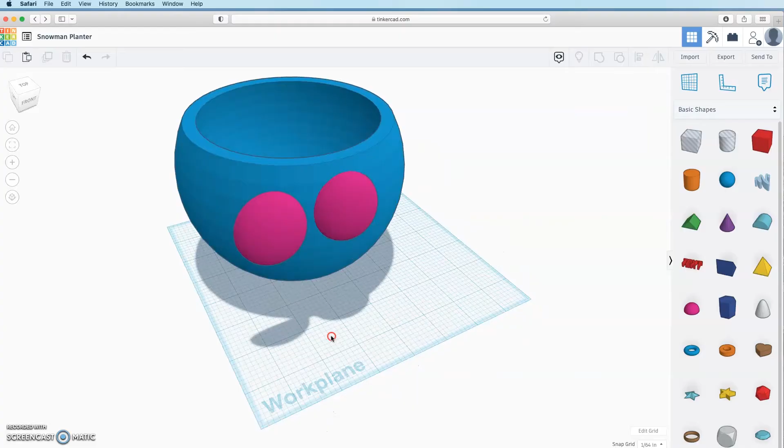Last time I showed you how to make a layered laser cut holiday ornament decorated with snowflakes. Today, I'm going to walk you through the process of designing a 3D printed planter or vase in the shape of a cute little snowman. Next time, I'll show you how to add light up eyes to the snowman, so stay tuned.

Now the first thing we're going to do is open up TinkerCAD. TinkerCAD is free web-based software that lets you create and edit 3D designs. For now, just go to tinkercad.com and create an account.

To create an account, click this Join Now button, then create a personal account by clicking this button right here. Make sure to remember your sign-in information, so email addresses, passwords, write it down, have that saved for next time. Next time you sign in, you're going to click this sign in button and use that information to sign in. Now, because I already have an account, I'm going to click this sign in button, click email or username, and type in my information.

So this is what my TinkerCAD dashboard looks like. Yours will look different. You'll have different designs, or if you haven't done anything, you won't have any designs created yet. So what we're going to do now is go to Create New Design. That's this button right here, and that's going to take us to our TinkerCAD workspace.

Let's take a look at some of the functions here. The first thing you'll notice is it gives your design a name. We're going to change ours. We're going to call this Snowman Planter.

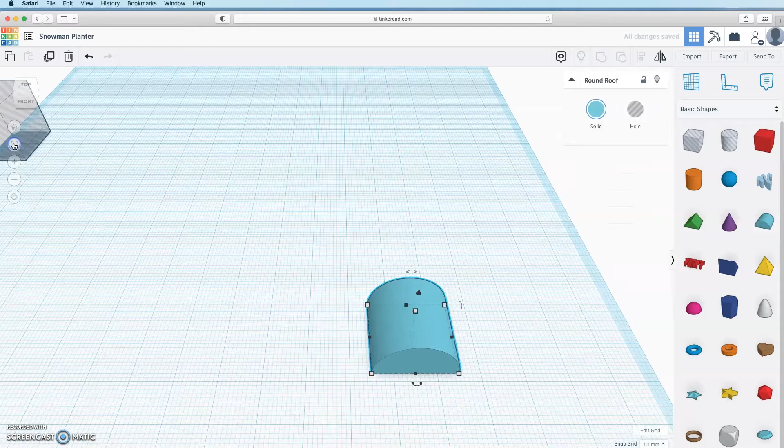You have your navigation tools over here. You can use this little square here to choose head-on views. You can always click this Home View button to return to the main view. Fit all in view, that's if you have a design, it'll kind of center it on the design. Then you have zoom in, zoom out, and this switches to a flat view, so it's like a 2D view.

On this side, you have your basic shapes that you can choose from. There are more shapes in here also, but right now we're just going to use our basic shapes. You have your work plane, which we'll be using a little later in this tutorial, for an example of what it does.

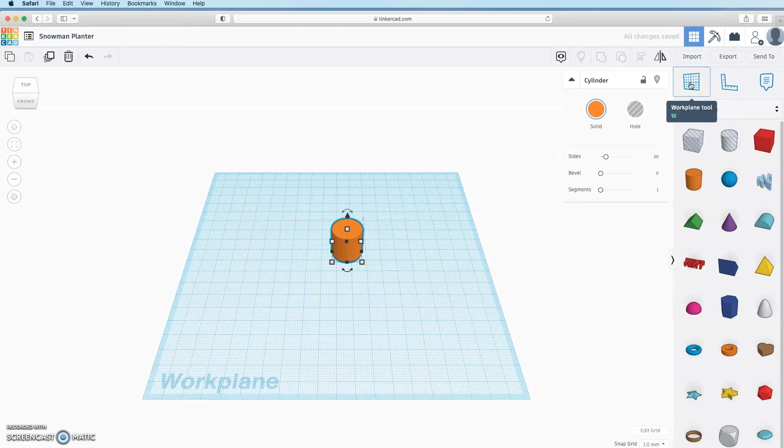Put your cylinder down here, and everything here is just drag and drop, okay? So you click, hold, drag it, and let go. Let's say I want to drag something onto the top of my cylinder exactly. What I'll do is take my work plane, drag it to the top of my cylinder, drag my next item to the top of my cylinder, and now you can see it's smushed onto that work plane. So now I can drag my work plane back to my original.

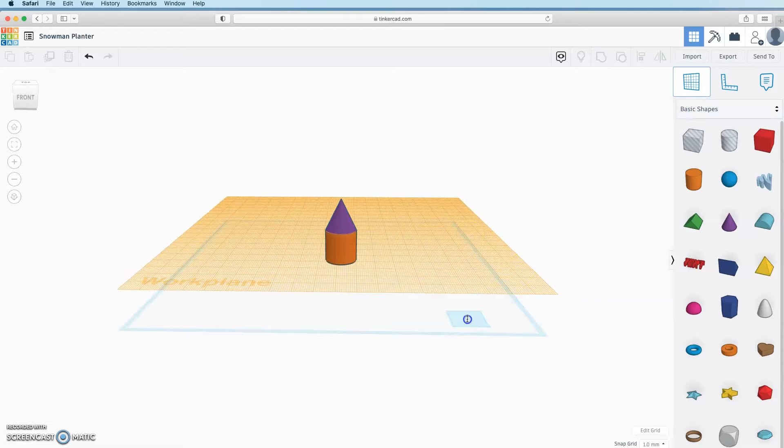I'm also going to show you the alignment tool. I'm going to click and drag to select both items, then click this tool up here, Align, and then click my cylinder. Now what this is going to do is align my cone to my cylinder. I'm going to click these little nodes here to align it. You see, now it's in line perfectly with the cylinder.

Now the next thing I'm going to do is again select them both, and click my group button here. That's going to create one object here, one object out of two.

Now you can also do that with your hole tool. Any shape can be turned into a hole. So let's say I want to take this shape here and cut kind of an irregular hole out of this original. What I'm going to do is click on this shape, turn it into a hole, select it all, and group. And now I've cut out that shape from the original.

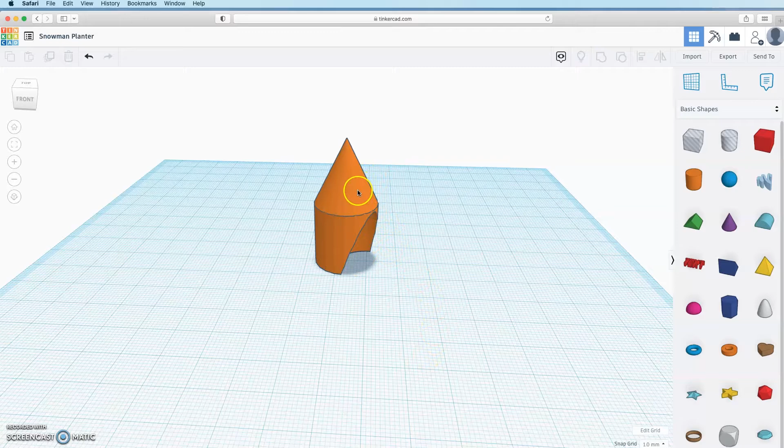Now let's say you want to kind of undo that, you don't want those shapes to be connected. You click on your object, click your ungroup button, and now you can move that shape again and change it.

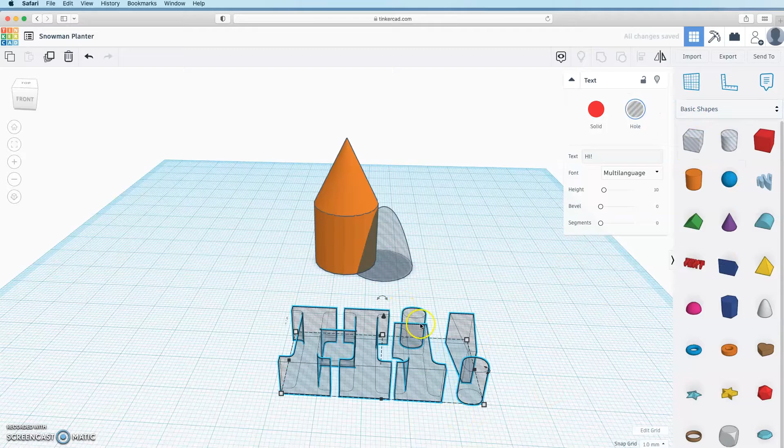The other tool that I'm going to show you is this text tool. If you click here where it says text, you can edit your text, make it say whatever you want, and then change this tool the same way you can change any other shape. You can even turn it into a hole. So, if I make a little shape here, I connect these by grouping. Now, it says hi.

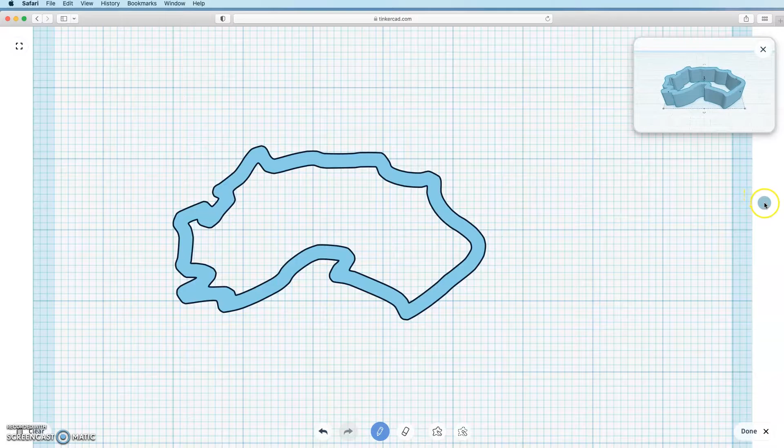And the last tool that I'm going to show you is the scribble tool. Click on that, drag it to your workspace. You can freeform a design of your choosing. You can erase, add back, and then when you click out, you hit done.

Again, you can edit this just like you can edit any other shape in TinkerCAD. You can move all of the size dimensions here.

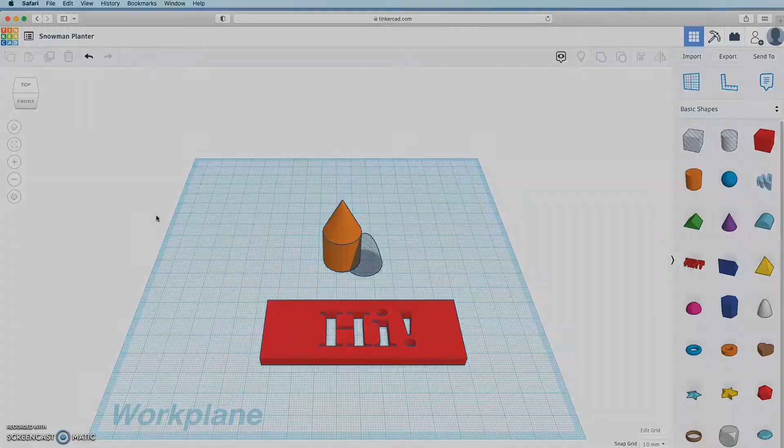Alright, so now that we have some of the basics of TinkerCAD, we're going to work on making a snowman vase. Here we are in TinkerCAD. First thing I'm going to do is hit Edit Grid. Make sure this is inches. Update grid, so we want to work in inches.

I'm going to pull this down. I'm going to change this to 6 by 6 by 6. And I'm going to take these steps up to make it smoother. Alright, now that I've done that, I'm going to zoom out a little bit.

I'm going to duplicate, to turn that into a hole, and I'm going to make this hole 5 by 5 by 5. And now I'm going to center it up. I'm actually going to put it here at the top because I want some more room in the bottom, some more space in the bottom inside my sphere.

So now I'm going to group these. So to flatten the bottom, I'm going to take this and make it 8 by 8. Select them both by holding down Shift, click my alignment tool, click the sphere to select it as the thing we're aligning to, and hit both of these nodes so I'm aligning my hole to my sphere. And now I'm going to change this to 0.4, and that's the height.

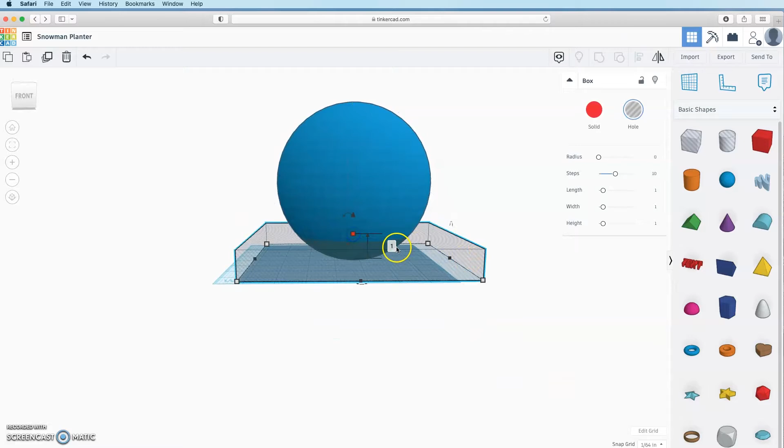Select it all and group. Okay, and now you can see I have a nice flat bottom. So I'm going to click that and click the D button. D is in dog, or in this case drop. It's going to drop it down to the active work plane.

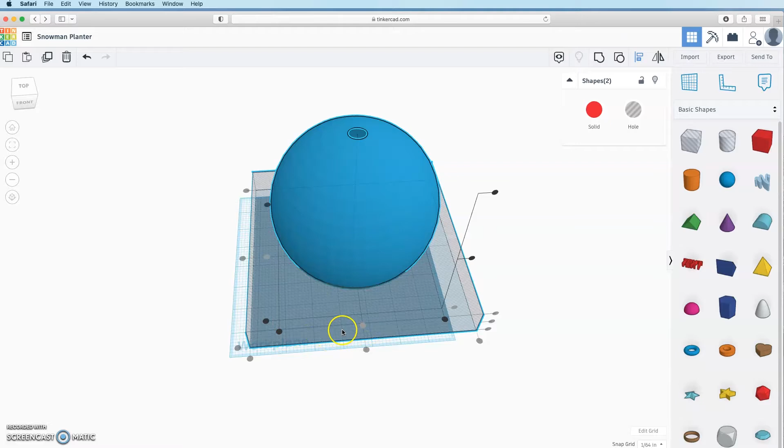Alright, so I'm going to repeat that. I'm going to make an 8 by 8, and now I'm going to align it. So I've selected both by holding down Shift, clicked Align, clicked my sphere, and now I'm going to align by clicking both those center nodes there. I'm going to align to my sphere, and now I'm also going to click this top one, and that aligns it with the top of my sphere.

See? Alright, so now that I've got that, I'm actually going to change this to 1/64, and I'm going to just click it up just a touch. And I'm going to change this height to 1.5.

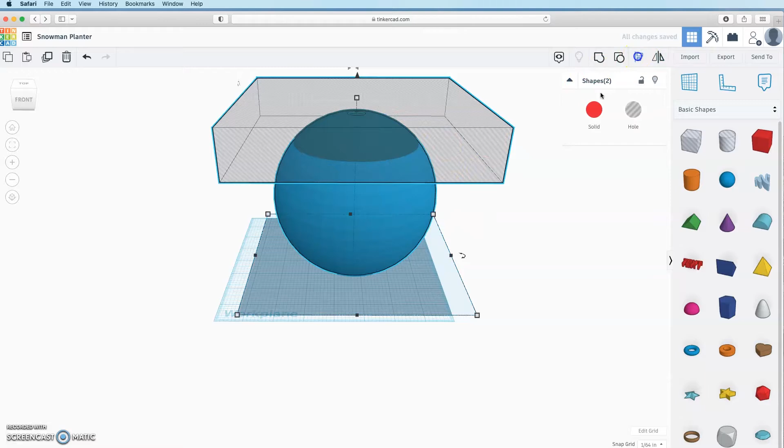Again, let's align it there to this, and let's just move it up just a touch, just in case. And select both by holding down Shift and clicking, and then we're going to click Group.

Alright, so now I have a nice top here, and you can see off to the side I have some shapes I've already made, and I've made notes about how big things need to be. I might refer to those, and you might see them in the background. Now we have our sphere. It's time to make the actual pieces of the face.

So we're going to start with the eyes. We're going to move that part of the snowman aside. We're going to take this little half sphere, pop that right down on our work plane, and change the size to 1.6 by 1.6.

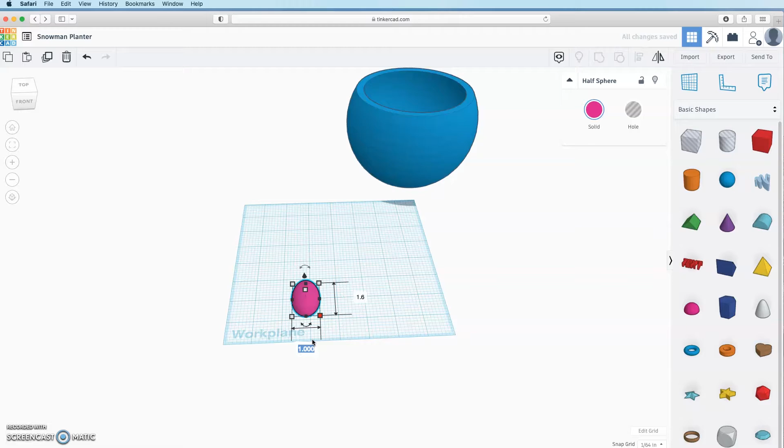Now we're going to click it, and change this to 90 degrees. Move this up, and we are going to align it to our sphere there. So we're going to click our Align tool, click on our sphere, and center that up. Now we're going to move it a little higher, and a little farther back.

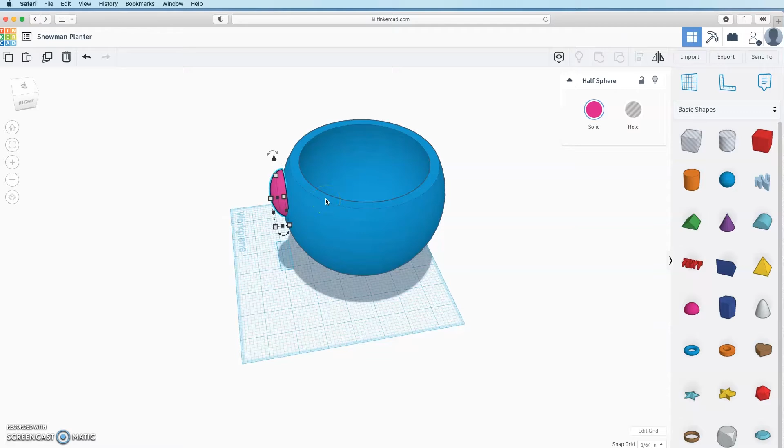And we are going to tilt it back about 10 degrees, and move it back a little, so that it's slightly sunken into the head there.

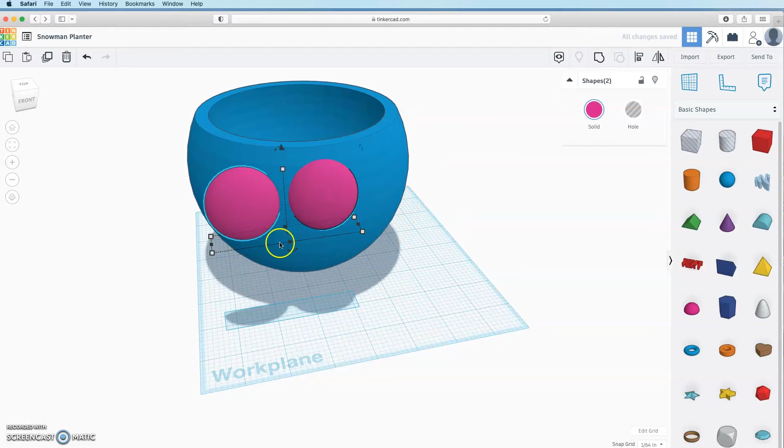Alright, now we're going to duplicate, and using my arrow key, I'm just going to nudge it apart. Now I'm going to select both of these, align them to each other first, side by side. That looks good, so now I'm going to group them.

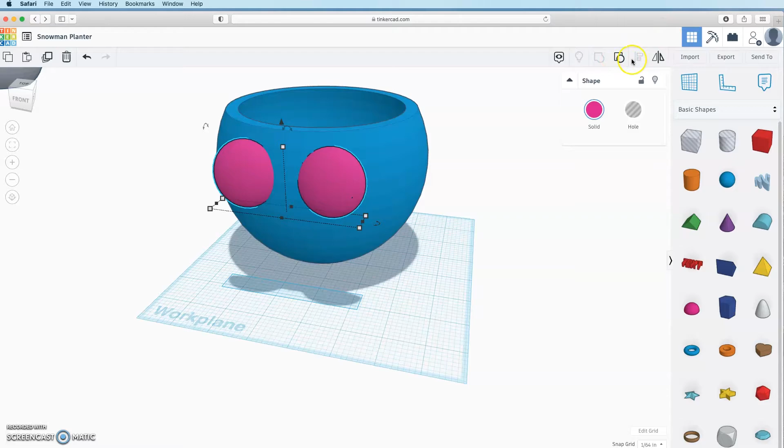And now I'm going to align that group here to my snowman head. Now I'm going to ungroup them. I'm going to move it about, let's try 15 and see, and then nudge it. Alright, so I'm going to do the same thing on this side. I'm going to take 15 degrees, and then nudge it.

Now I'm going to select both of these, turn them into holes, still holding down Shift, select my sphere, and click on Group, and see what those eye holes look like. Not quite in enough, not quite round enough. Okay, let's undo. Let's take it back another 5 degrees.

There we go, that's nice and round. Now it's time for us to make our nose.

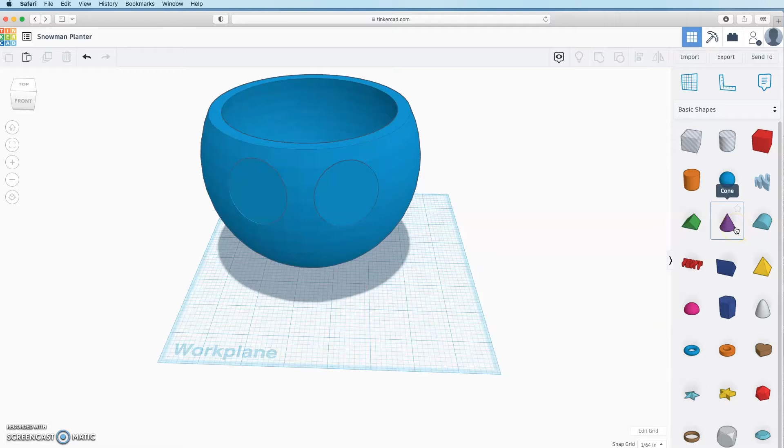So to do that, we're going to grab the cone. I actually think 1 by 1 by 1 looks almost pretty good, but we're going to make it a little longer, so we'll go with 0.75, but keep it 1 inch long. It's going to look super cute, I think. So now that we've done that, we are going to put this at 90 degrees.

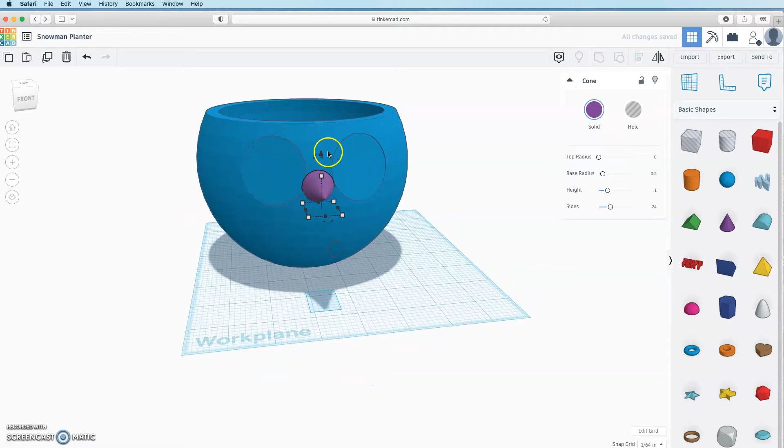Raise that up, just keep it roughly where we want it. Hold down Shift, select our sphere. Let's align, hit our alignment tool, hit our snowman. We're going to align it to our snowman.

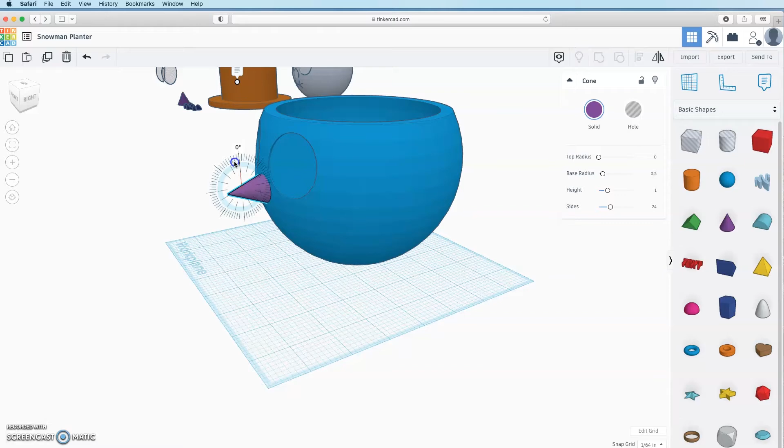It's pretty good, I think. Take it down a tiny bit more. There we go. Now we want to make sure it's just a little bit inside our snowman. Let's take this down about 10 degrees rotation. Then, using the arrow keys, we're just going to nudge it so it's completely inside our snowman.

Once we have that, we're going to duplicate. Let's actually ungroup this real quick. Let's make our eyes a group, and let's center this guy up to the eyes. Okay, it was already centered. That's good. Let's group these, so we have those eye holes again.

Now we're going to turn this into a hole. Hold down Shift, select both of these, click group. Good, so now we have a little hole for our nose to fit into, and holes for our eyes. It's all looking pretty good.

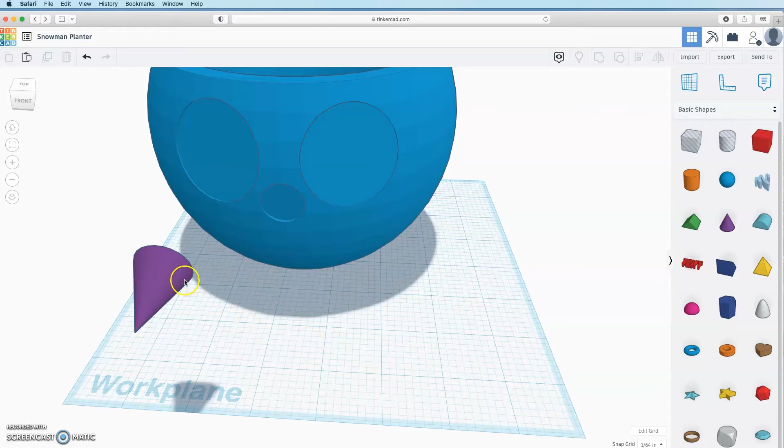This I'm going to take back 10 degrees. Now I'm going to take it back 90 and just drop it by hitting the D button onto our work plane. It's going to be another part we're going to print later - it's going to be the nose. To remind myself, I'm just going to make that orange, and I'm going to make this guy white.

So now we're going to do the mouth. It's kind of interesting, the mouth. I'm going to do something a little different, a little neat. I'm actually going to open up a new tab on the internet here. I'm going to type in Thingiverse.

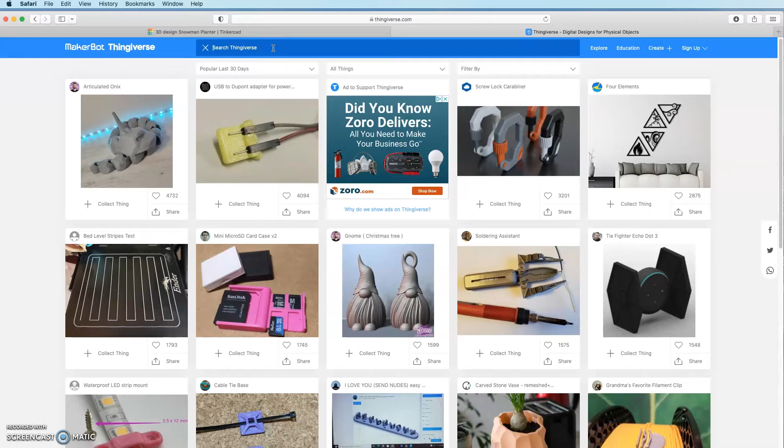So Thingiverse.com, under the search Thingiverse box, I'm going to type Vine. Hit enter. Full disclosure, I already knew about this - I used this model previously to make a trophy. So I'm going to click on that, then go down to Thing Files, and the only thing I need here is Vines Right. Download that, okay, now I can close that.

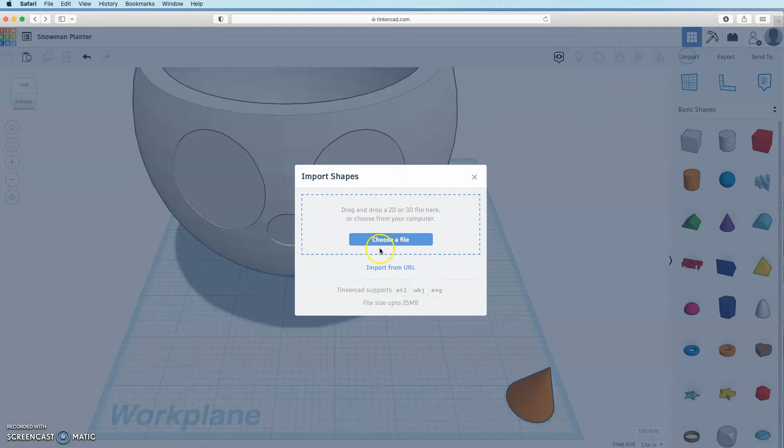What I'm going to do now is import it. Choose a file from my downloads, and it's going to be Vines Right. I'm going to hit import. Might take a little while to import - let it take its time. Okay, when it imports, it kind of looks like this.

So what I'm going to do is use this as my mouth. I'm going to rotate it so it looks kind of like a smile. How cute is that? I'm going to put a cylinder on top of it, put my sides up. So what I'm trying to do is kind of get the curve here of this shape, more or less. And we can align these.

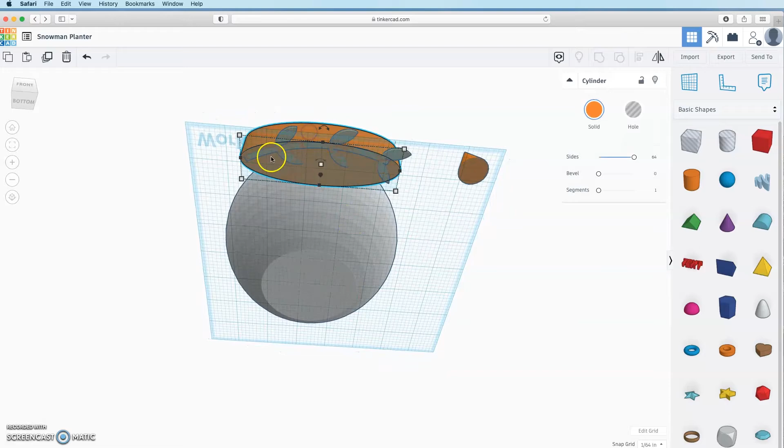Okay, once I have that, I'm going to duplicate this. Make it a little bigger so I can see it better, maybe a different color. I'm going to pull that in, again following roughly that vine there. Make it a little bigger.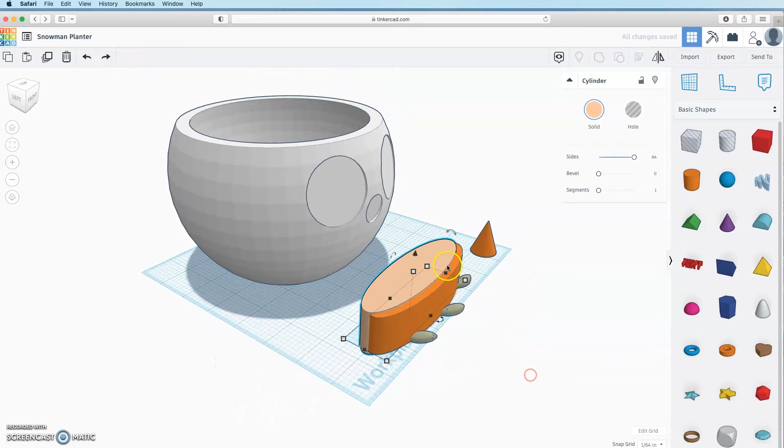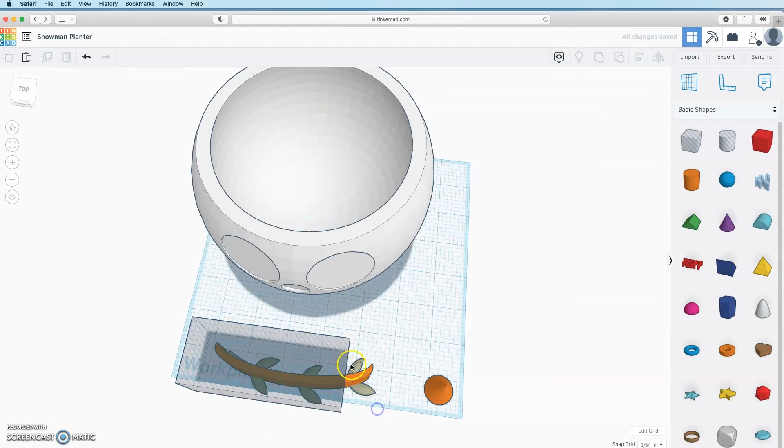Okay, I'm going to make this a hole. Hold down Shift, select both of these, and group. Now I'm going to take a hole, put it down here, sink it a little bit, and make it large enough to cover everything except just these two leaves. Select it, hold down Shift, select my leaves, and group.

So I'm kind of making a mouth here. Now what I'm going to do is duplicate this, pull it down a little bit, and make it a hole. Select my hole there, hold down Shift, select my leaves, and I'm going to click group.

So now what I should have done is made my leaves into these two separate objects, if you can see that, that cling real well to this. So now what I'm going to do is make my mouth a little smaller, and I'm going to group those. So now it's one object.

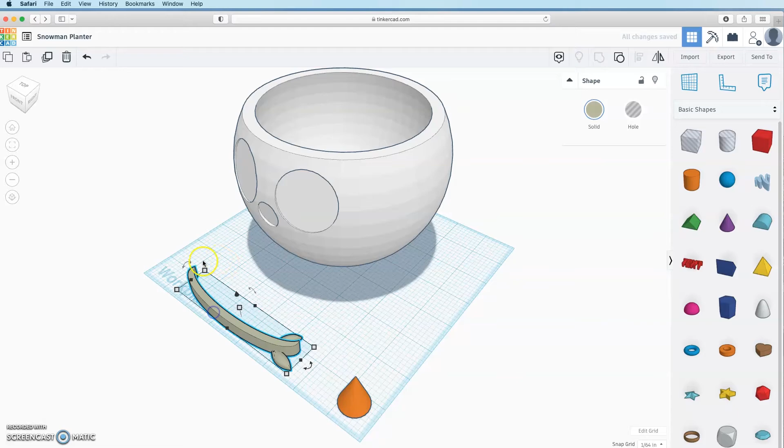I'm going to turn it here 90 degrees, and just like I did with the other pieces, I'm going to pull it over here. And now let's resize it a little bit, okay?

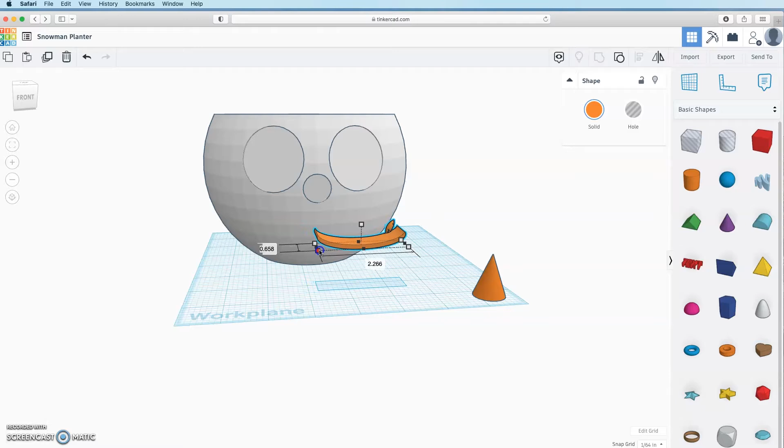Let's ungroup for a second. Make that a little bigger. Now we can regroup. Now let's hold down Shift and Control. Make this a little smaller. Let's ungroup - what we're going to do is just nudge this out. Group.

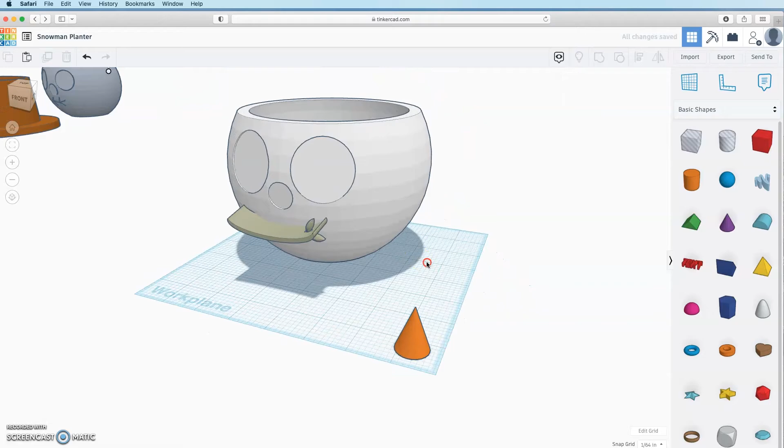Let's lower this about 10 degrees, let's nudge it. That looks pretty good, that looks super cute, right? Nice little smile. Alright, so now what we're going to do is ungroup this.

We're going to nudge that using our arrow keys so it's just kind of touching. Let's move that about 10 degrees as well. Let's pull that in a little more. It's going to be a really cute little smile, right? Make it a little bigger.

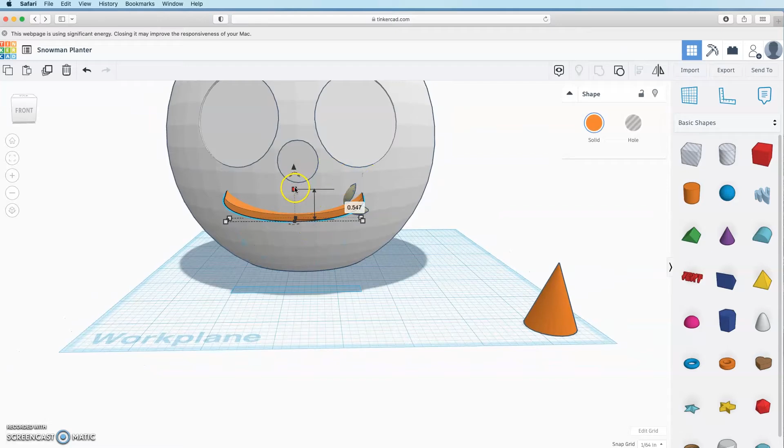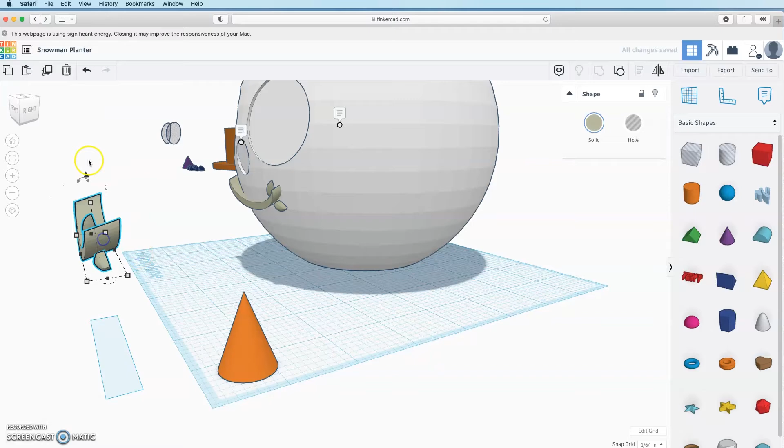Now that we have that, we're going to take these, group them, duplicate, and pull that off. So that's a piece we're going to work with in our Prusa slicer. For now we can move it in about 10 degrees, and then after that we did 90, and then drop it.

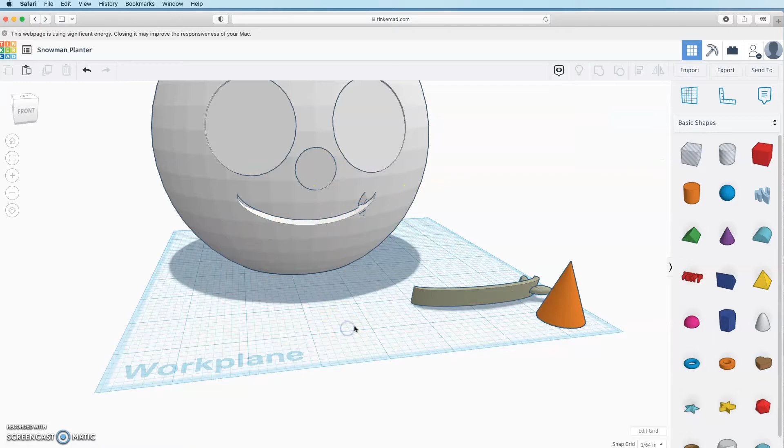So we're going to use that piece, but this one we're going to turn into a hole. Hold down Shift, select that, and we are going to group. So now this is going to have a hole there that can fit into later on. So we have holes for our eyes, a slot for our nose, and a slot for our mouth here. It's looking really cute so far.

Okay, so now it's time to make the eye sockets. Next time, what we're going to do is add some light-up LED rings that you can program with an Arduino. You don't have to do that for this project, but we're going to be building on this project next time, and part of doing that is we need to make some little eye sockets to hold the little rings in place.

So to do that, we're going to click on our snowman and ungroup him until we get the eyes here, and we're even going to ungroup the eyes. We kind of want them separate for this, okay? Now we're going to take a cylinder, drag it in, slide the sides all the way up.

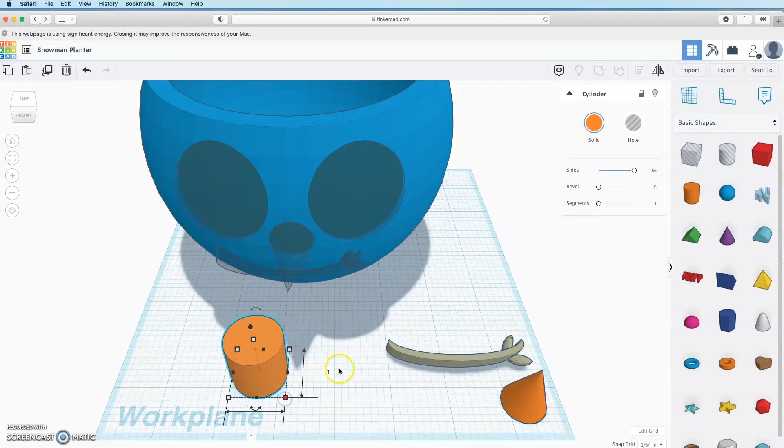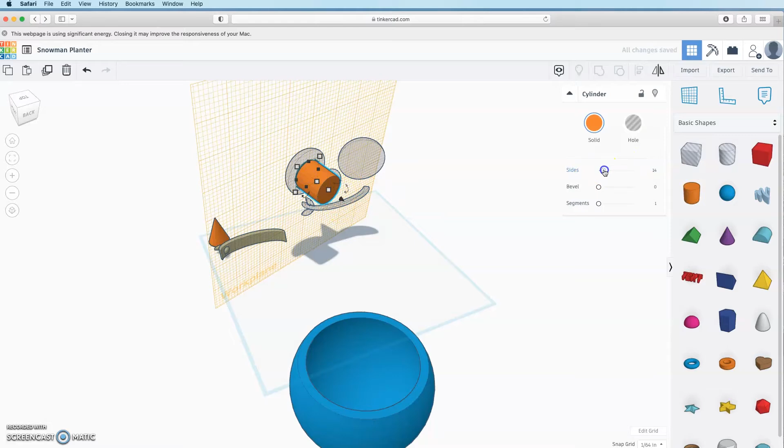We're going to make this 0.7 and duplicate. Now we're going to take our little snowman and slide him down out of our way for a minute. You know what, let's actually delete these cylinders. Let's instead drag our work plane here onto one of these. Now drag a new cylinder on, slide the sides all the way up, and change it to 0.7.

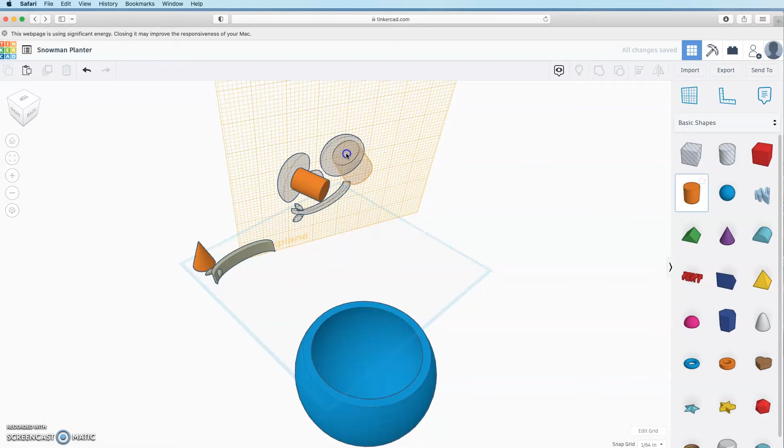Holding down Shift, select the eye there. Click your Align tool, select the eye again, and center that up. Alright, good. Now we're going to repeat: drag our work plane here onto the second eye, drag a cylinder down, drag the sides up, change it to 0.7. Hold down Shift, select our eye, click our alignment tool, click our eye, and now we're going to align.

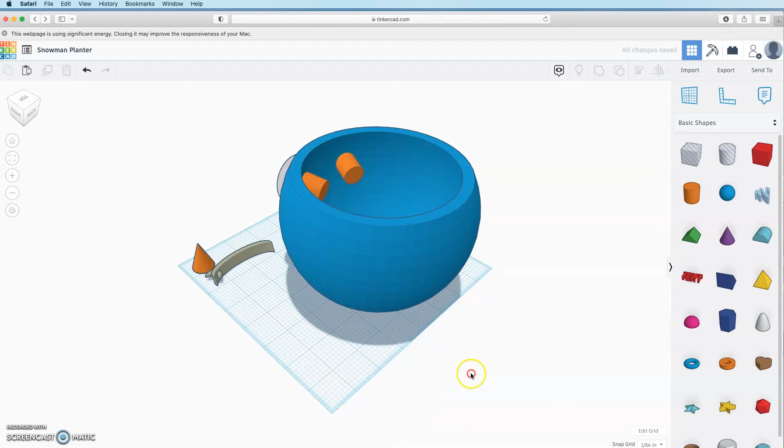Going to change our work plane back to our regular one. Click on our snowman, hit D to drop it back to its regular height. Now we're going to select our eye, hold down Shift, select our eye, select our nose, select our mouth, select our snowman, and we're going to group.

Now we see we have these going through a little bit. We don't want that, so we're going to click that and just use our arrow keys to nudge it. I did 3 little nudges until I don't see it anymore. Now I'm going to click, hold down Shift, click, hold down Shift, click, and group. Excellent, so now I have my eye sockets and I have my nose and my mouth.

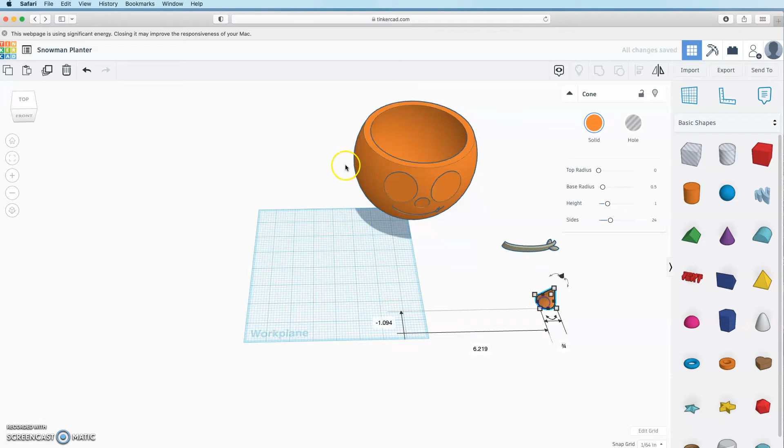So now it's time to make the hat. I'm going to move the stuff all aside a little bit so I can work on my hat, and grab a cylinder and move it down. This is going to be black, just as a reminder of what color I'm doing it in. Make my sides go way up here.

And this is going to be, if I check my notes, how big I made this? 7.5, okay?

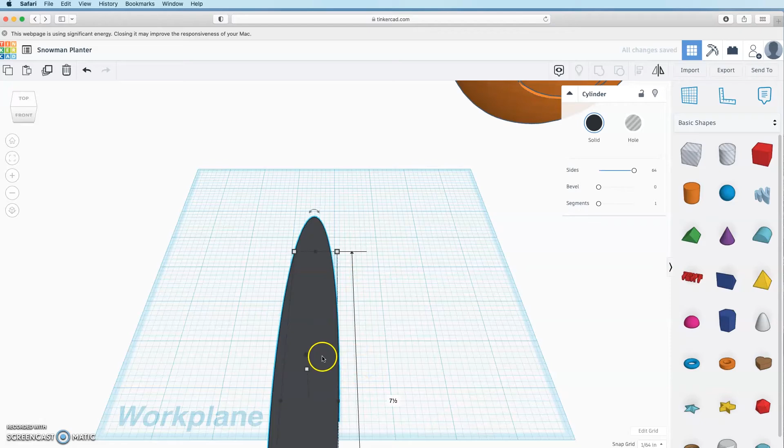So 7.5 by 7.5, and this was, I think, 0.4 tall. And I'm going to center that up.

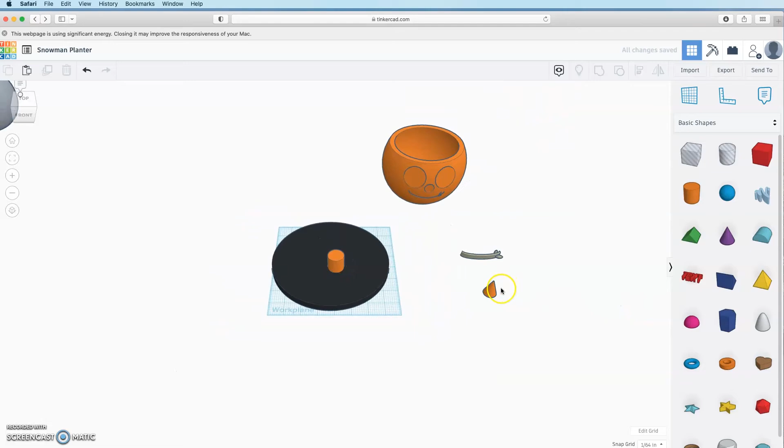Now we're going to take another cylinder and put that on top. Let's delete that, move our work plane here, take a cylinder, put that on top, then move our work plane back to its normal one. Move the sides up. Let's see how big this one's supposed to be: 5 by 5 by 3.

I'm going to click on the top of my hat here, turn it black just so I can see it better, hold down Shift, click on the bottom of my hat, click my alignment tool, click on the bottom of my hat, and now hit these two center nodes here to align my hat.

Now we need to make the hole that goes through the middle. Let me check my notes: the hole is 4.5 by 4.5 by 6.5. I'm going to duplicate this, raise it up a little, turn it into a hole, and do 4.5 by 4.5 by 6.5.

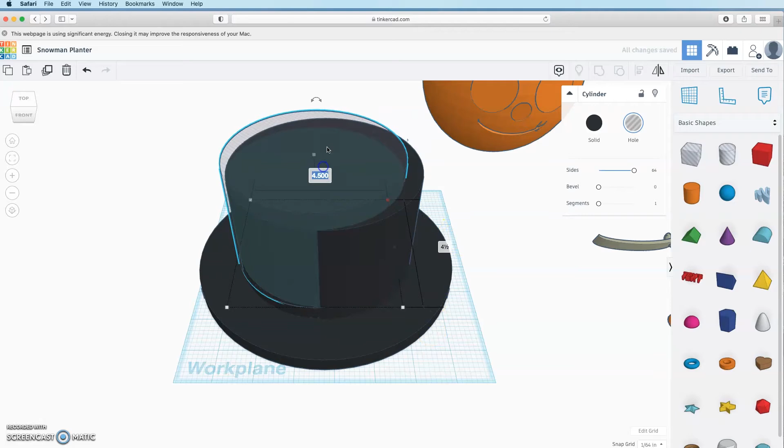Again, I'm just going to hold down Shift and select the bottom of my hat, hold my alignment tool, select the bottom, and align that right up so it's in the center. Push it down because I want it to go all the way through. Select all of these, holding down Shift, selecting each part, and group.

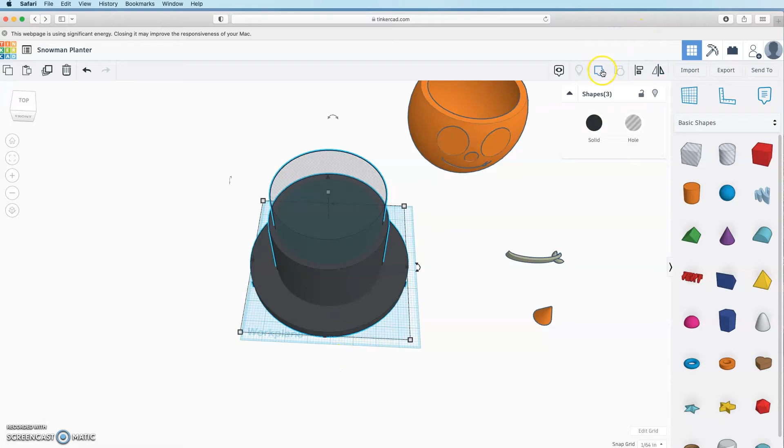So now I have my hat. It's looking good. Now the next part, I'm going to drag my snowman head right here, and I'm actually going to duplicate it, and move my work plane over here onto this rim.

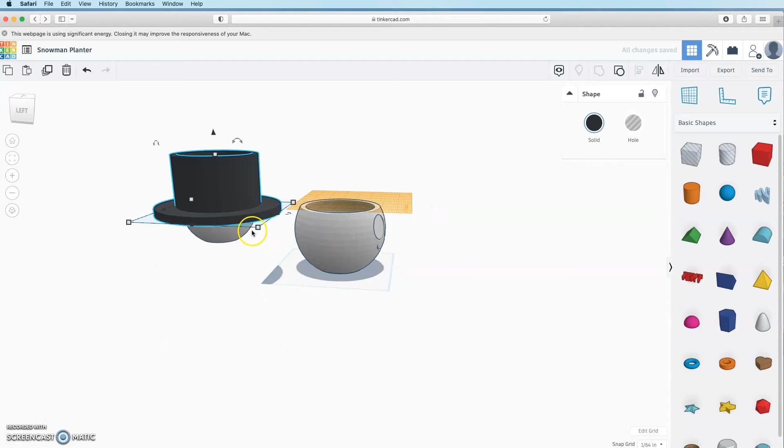Click on my hat, I'm going to hit the D button to pull it up to that work plane. Now click on my hat, hold down Shift, click on my snowman. I'm going to hold the alignment, click the alignment tool, click on the snowman again, and hit these center nodes here to line up my hat on my snowman.

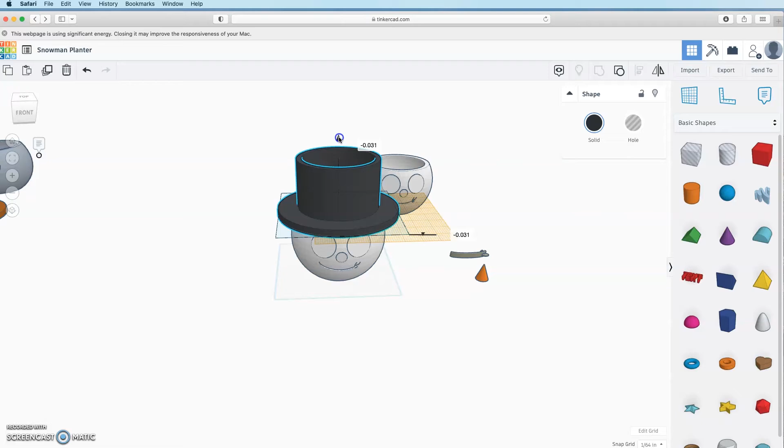Now I'm going to click on my hat and sink it just a little bit, the tiniest bit, there, so it's just a little in there. The reason, you'll see in a minute, is I'm going to turn my whole snowman into a hole. Hold down Shift, select both of these, and click Group.

Move my work plane back to normal, and if I flip this around 180 degrees, you'll see that I now have this little channel in here. See that little channel right in there? That is where my snowman is going to fit, so it's going to snap into place.

So I'm going to move that back to 180, hit D to drop that down to the bottom. Now I have my hat, my snowman, my mouth, and my nose.

Okay, these next steps are optional. We need to add some drainage holes down here because this is a planter. So if you're going to be using yours as a planter, you'll also want to add some drainage holes. We're just going to take a cylinder.

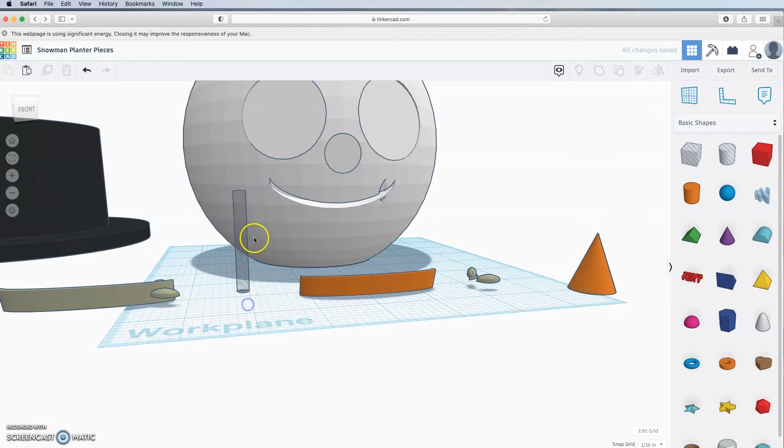We're going to make it pretty small, so let's do 0.2. And what we're going to do is make it pretty tall there, and let's duplicate. So we want 4 of them.

Now let's align these to something just so we can align it nice and smoothly. Let's take a 1 inch. What is a 1 inch? Yeah, that looks good. Okay.

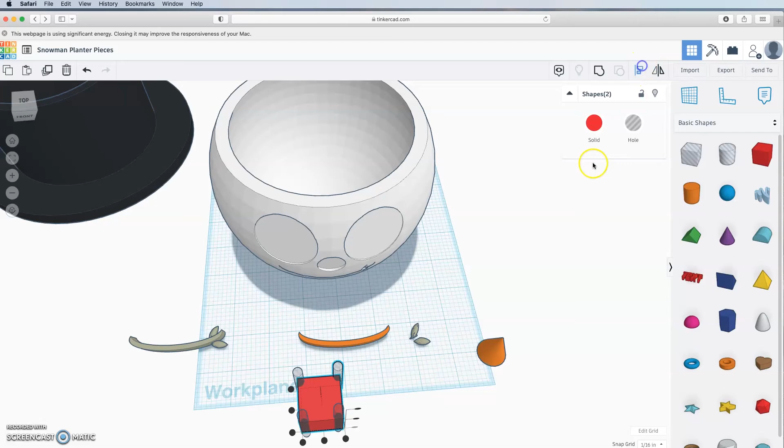So I'm going to roughly put those where I want them. Click on one of these, click Align, click that, now we're going to align it to that. And repeat.

Now when we pull that away, these should be nice and aligned. I'm going to click on these. I'm not going to turn them into holes right now. Actually, I'm going to make them solid just so we can see them, and change them into a group.

Now I'm going to center align this to my snowman. I'm going to make these nice and tall, then sink them in. I want them to go all the way through. I'm going to ungroup them, and I think I can actually push them a little further apart, so I'm just going to nudge them using my arrow keys.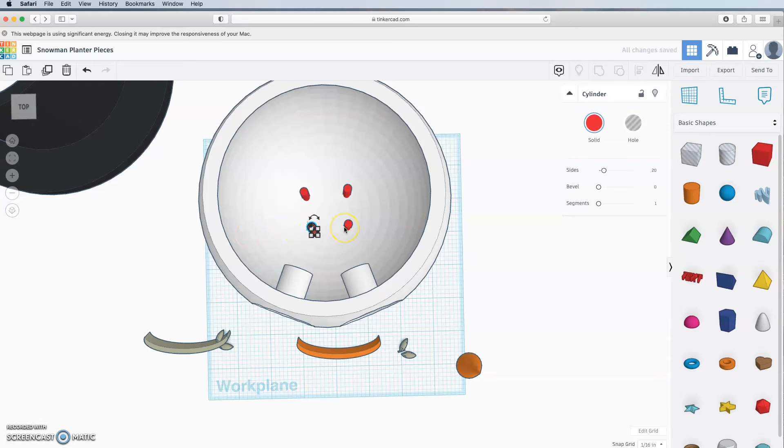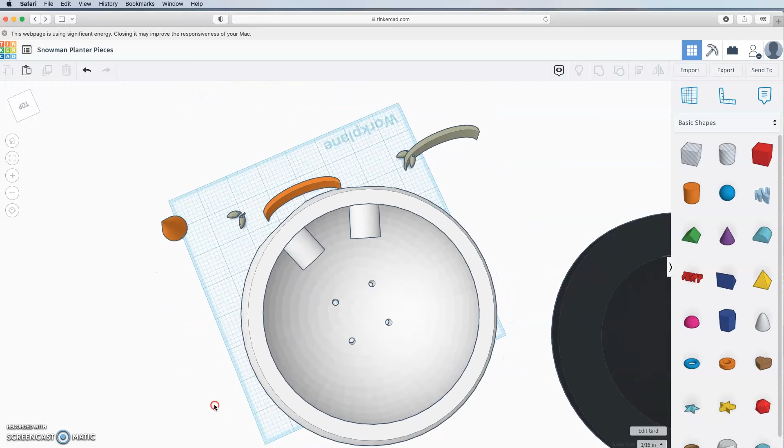And I'm going to make sure that they go all the way through - and they do. Okay, so now I'm going to click on them, holding down Shift, click on each one, hit Group. And I'm going to turn that into a hole, hold down Shift, click my snowman, and Group. Alright, so now I have those drainage holes. That's useful for a planter.

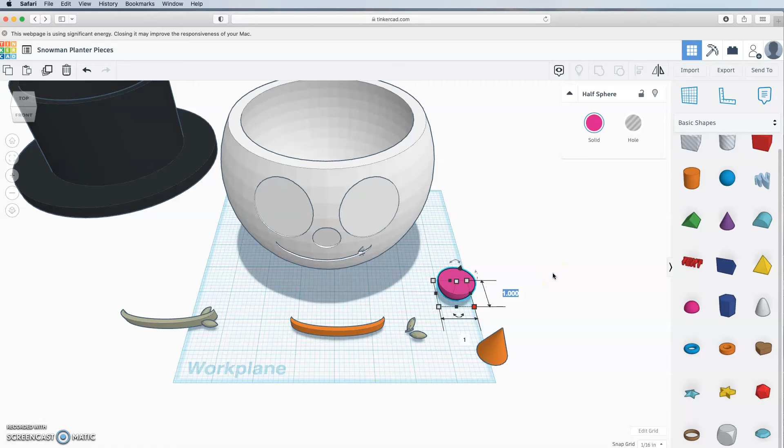And another option here is to actually add - since this is a planter and there might be drainage, let's say you don't want to have any drainage on your counter or something - it's actually to add a little plate to the bottom to do some collection. So what we're going to do here is just take a half sphere and turn it around to 180. Okay, and this is 6 by 6, so we are going to make this about 6.25 by 6.25.

We're going to make it a little taller. Let's do about 0.75 inches tall, so it's going to be pretty shallow.

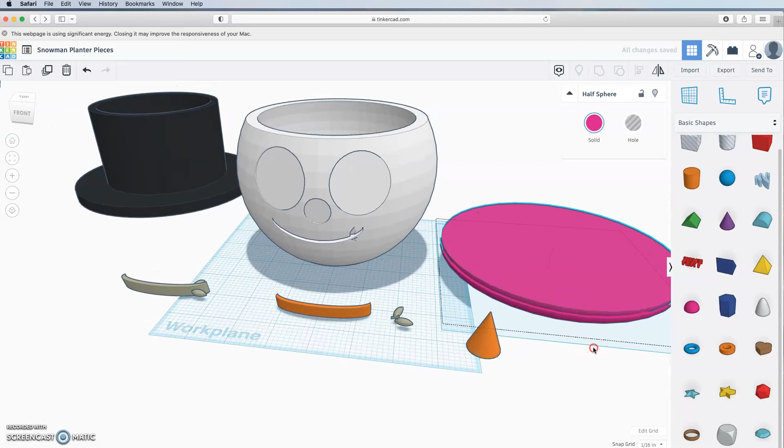Now we're going to duplicate that, and this is going to be a hole. So we're going to make this even smaller. Instead of 6.25, we're going to make this 6. And then instead of 0.75, let's do 0.5. Going to make that a hole.

And now we're going to align to the top there. Pull it up just a little bit. Select both and group. So that gives us like a little collection plate there. Now you can see that's going to sit right there.

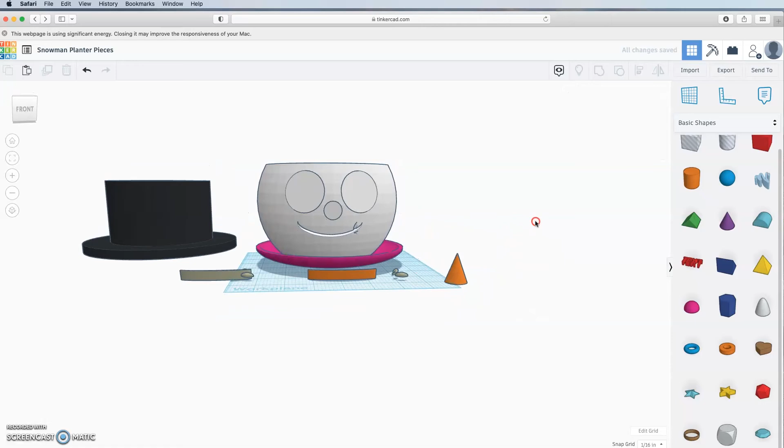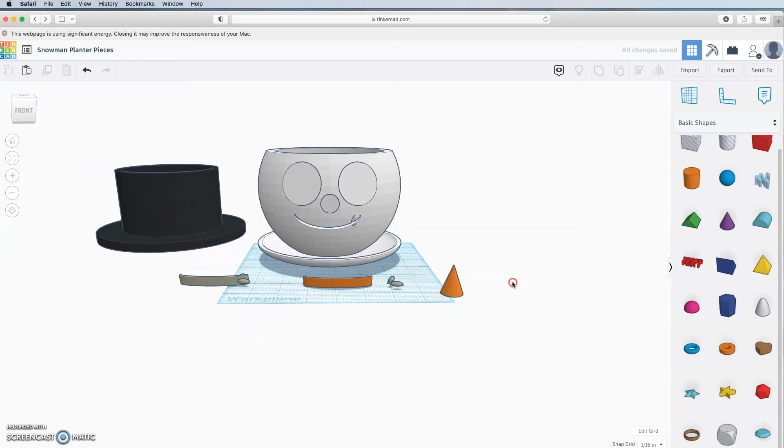So if we align these, and you lift that up a little bit, you can see it's going to sit on there, so it can collect any little drainage, and we're going to make that white as well. That is optional. If it's going to be outside, you don't really need that, but if it's going to be inside on a countertop or something, you might actually want that.

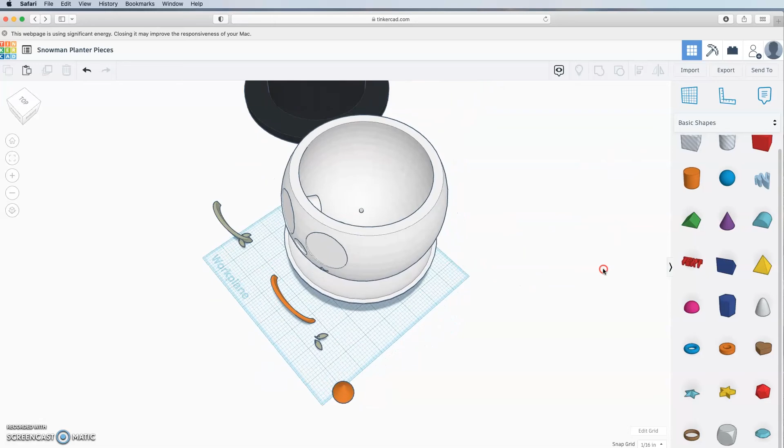Another option is if you are going to add the electronics, you're going to want to add a hole for that, so you're going to want a tube so that your cord has somewhere to go. To do that, we're going to take a little cylinder, and 1 by 1 should be big enough. Gonna make that 90 degrees. Gonna make it kind of long.

Hold down Shift and select our snowman. Select our alignment tool. Select our snowman again. Let's align it here to the center of our snowman. Basically, you want a channel here to feed the electronics through.

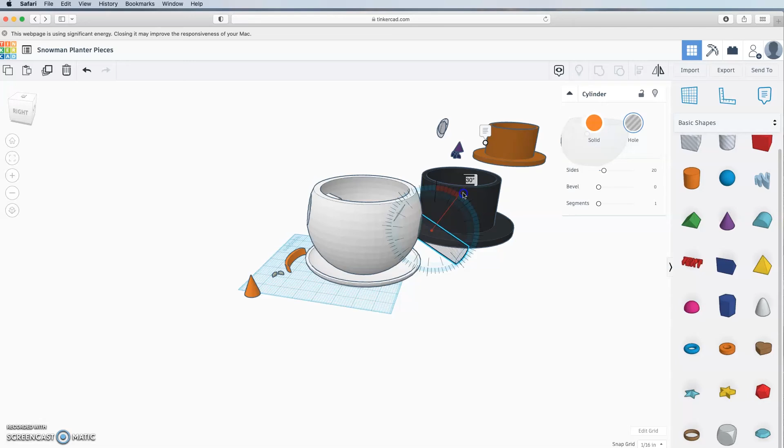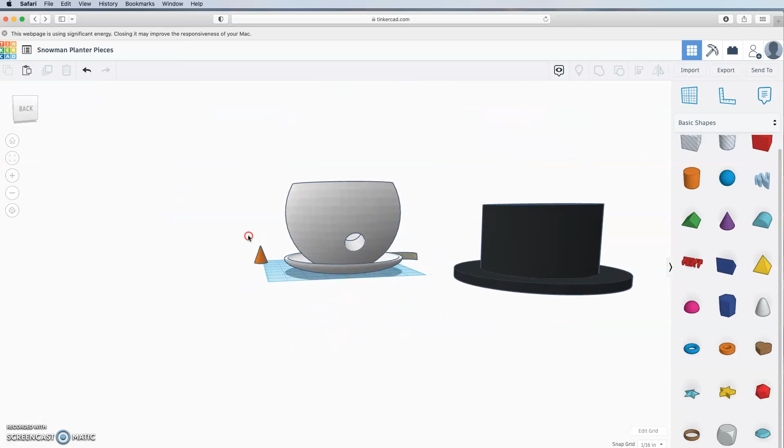So what we can do now is we can actually take that down about, let's do an angle of about 30 degrees. And now let's lower this. Your electronics will come in through there. So now we're going to hold down Shift, select our snowman and our hole, click Group. And now there's a hole in the back for the electronics to go through.

There's actually one more option here. Let's say you're not going to add electronics to the inside, you don't want to have light up eyes. What we're going to do instead is some little coal eyes. So we're going to take this diamond tool and drag that down.

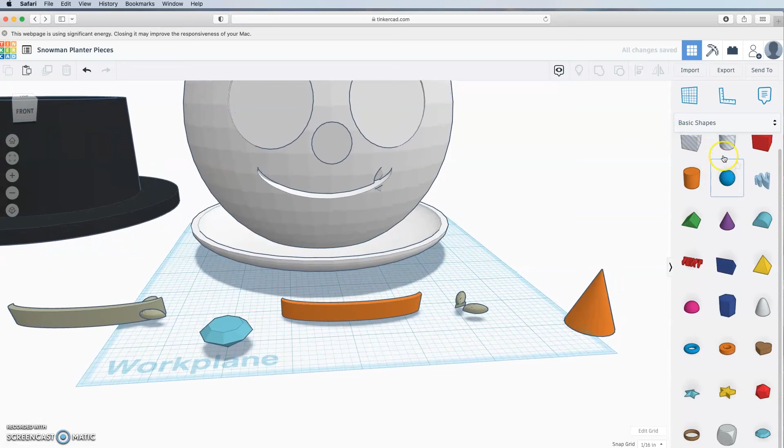We don't want this part, we just want the top. So let's resize it first. Remember we made the eyes 1.6, I think it was, so let's change these to 1.6.

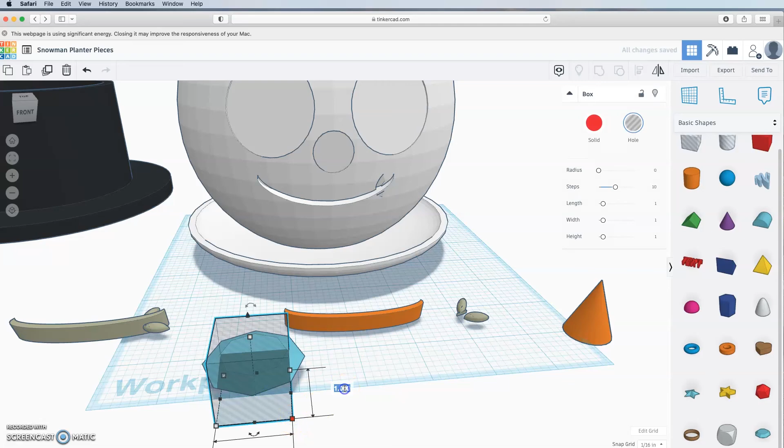Now we're going to take our hole here to box, going to make that 1.6. I'm sure you can see what we're doing. Going to drop that. So let's align these.

Let's raise this right to the point where it starts to raise. And let's actually lift this a little. Hold down Shift, let's group, change that to black. Once we're sure that looks cute, and I think it does, looks like two cute little eyes of coal there.

I'm just going to duplicate, so you're going to have another one that has eyes, and those you're going to print with your hat, because it's going to be black like your hat, okay? So these are all parts that we're going to print. We're going to print them separately: our snowman in white, our hat in black, our nose in orange, and our mouth in brown, like a wood filament.

And then you're just going to export that, probably to your downloads, as an STL. Okay, and we are done with the Tinkercad portion of designing this snowman vase.

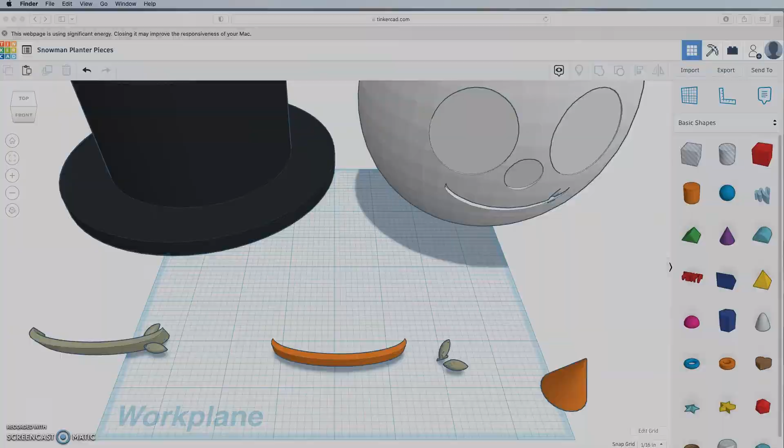Alright, so if you are printing this on your own 3D printer, you can go ahead and use your own software, your own settings, just print it as you usually would.